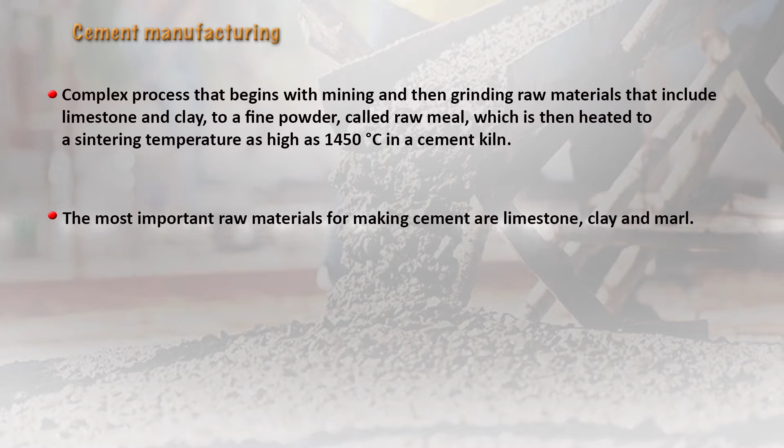The raw materials used for making cement normally include limestone, clay, and marl, extracted from quarries by blasting or ripping using heavy machinery. In India, limestone reserves are quite abundant. You find them in Meghalaya and in certain southern regions. There are a lot of good companies manufacturing cement, very good ones even in the south of India.

They actually have proper environmental rules, and they even convert the fly ash and other materials coming out of their processing, recycling and reusing them for other purposes, maybe for roads or for making eco-friendly environmental blocks for construction. So even the final products can be converted into non-toxic and useful products later on.

Basically, cement is a binder, a binding agent. It is a substance used for construction that can set, harden, and adhere other materials to bind them together. You would have seen in construction places, even when constructing your own houses or companies, cement is being used. First you see a little bit of red soil or clayish material, then you use the gravel, then you use the cement.

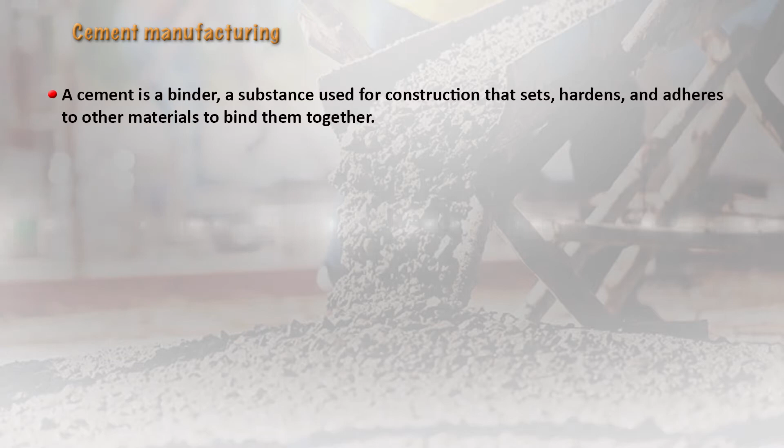All this is mixed together, and sometimes a binding agent like Fevicol powder is also used. They are all mixed with water, in a consistency that can hold the blocks or bricks together. Here you find clay bricks put together, bound in between with cement plastering material, and then the outer plastering is done, and also for the roofing where lintels have to be done for the houses.

Here again there are big machines that come, the ready-made cement and gravel mixer, where all these materials are put in and it keeps rolling in a mechanized way. Then it has special equipment where the mixture can be spread out evenly on top of the buildings, on those beams, binding them together, and after hardening it becomes a very solid, airtight, and waterproof material used in construction purposes.

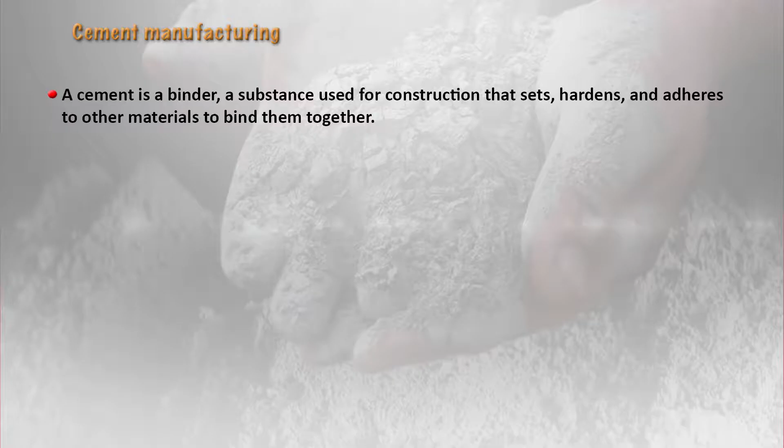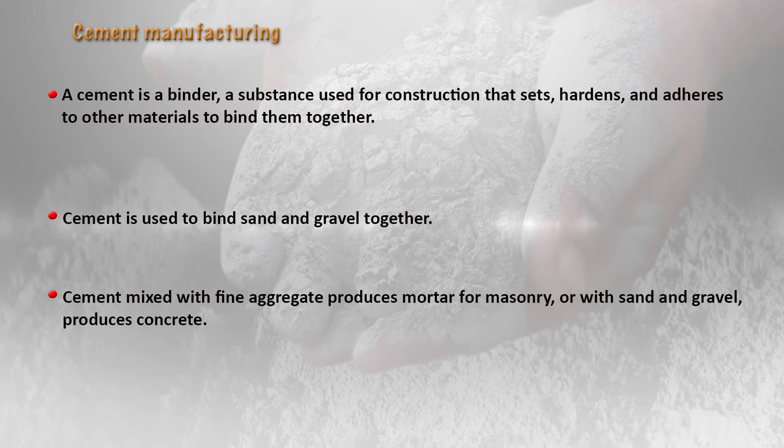The initial calcination reaction in the production of cement is responsible for about 4% of the global carbon dioxide emission.

So it is not that the cement industry is free of adverse environmental impacts. It is responsible for a certain amount of global carbon dioxide emissions, contributing to greenhouse gases and global warming. The overall process is responsible for 8% of global carbon dioxide emissions.

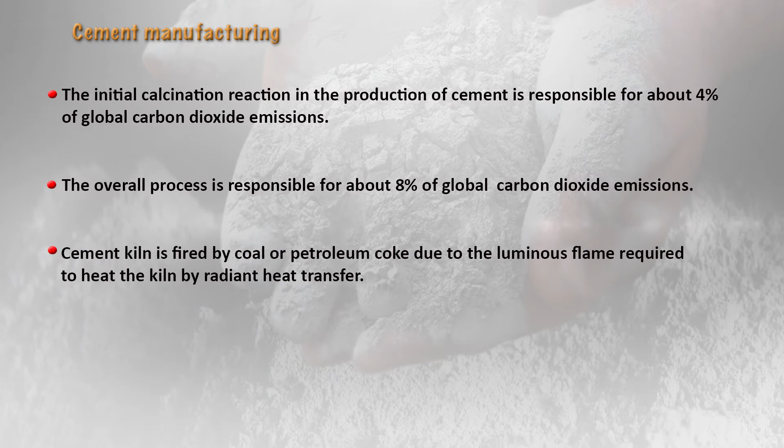The cement kiln is fired by coal or petroleum coke, due to the flame required to heat the kiln by radiant heat transfer. As a result, the production of cement is a major contributor to climate change.

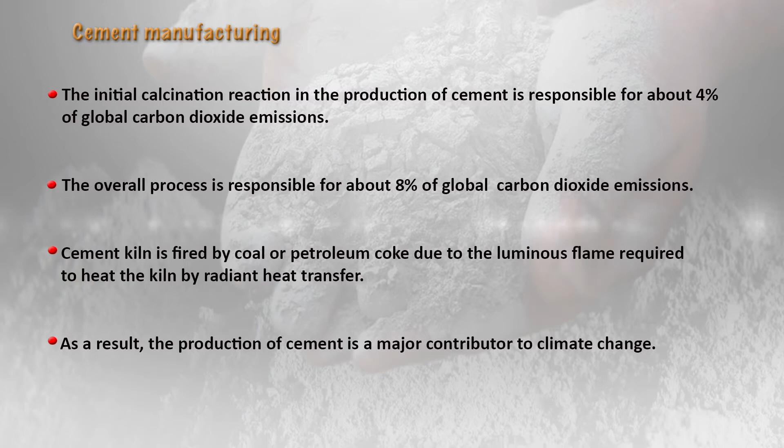The most common type of cement is hydraulic cement, which hardens by hydration of the clinker minerals when water is added. Hydraulic cements include Portland cement, made of a mixture of silicates and oxides, which is what we normally use. The silicates are responsible for the cement's mechanical properties.

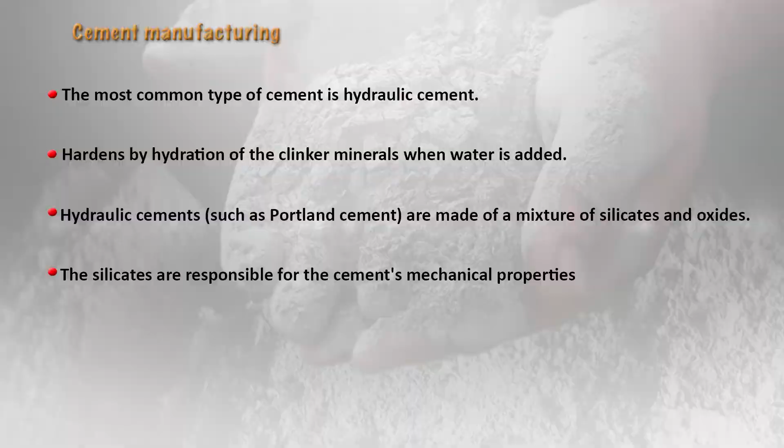Now when conducting an environmental impact assessment survey of such cement projects, we need to identify the positive and negative alterations of the natural and human environment which may affect the quality of life, as well as present and future options for sustainable social and economic development in the area of influence.

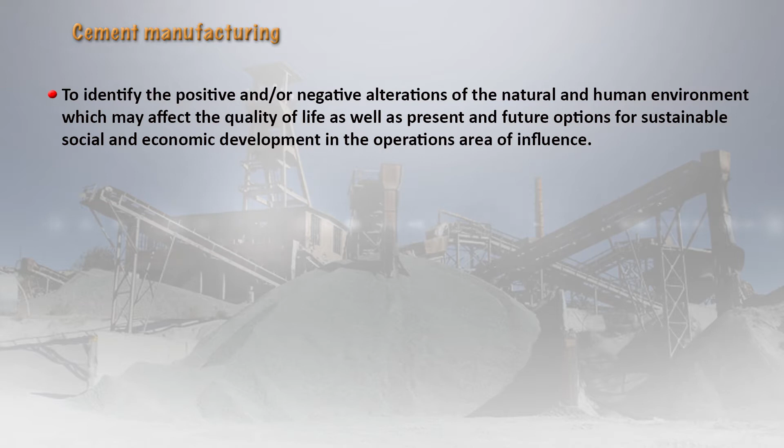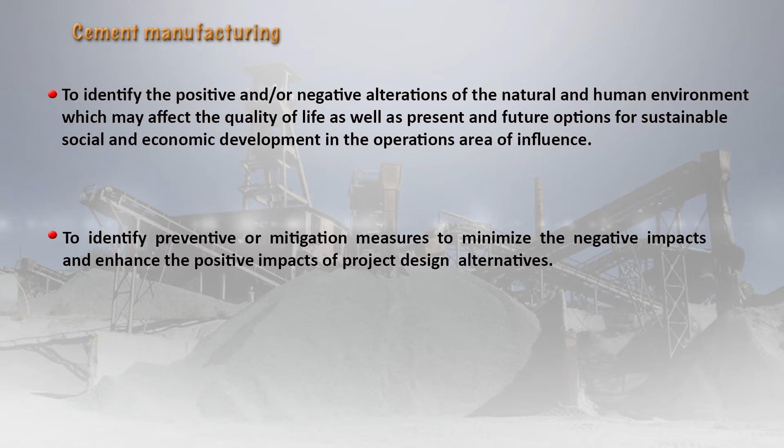We need to identify and discuss preventive and mitigation measures to minimize the negative impacts and enhance the positive impacts of the project design alternatives. We need to determine whether the proposed operation is the optimal or at least a viable solution to the development needs it addresses.

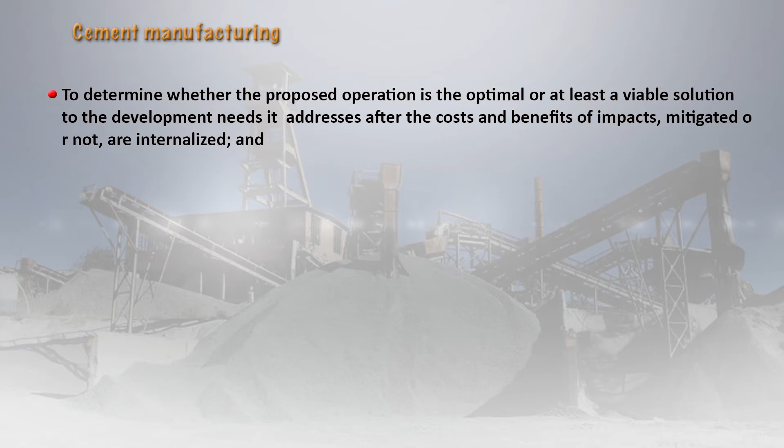After the cost and benefit of the impacts, mitigated or not, are internalized, we need to recommend a course of action including the preventive or mitigation measures, after comparing the alternatives, including that of no action.

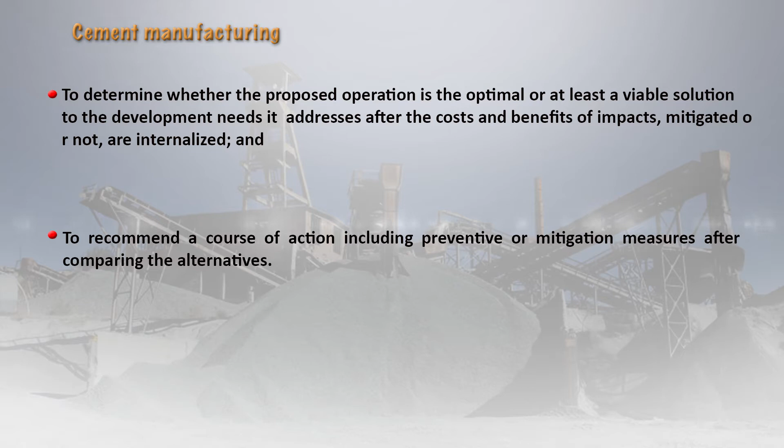A description of the proposed operation and its objectives needs to be outlined, along with an analysis of the project involving a description and evaluation of the impact and cost benefit analysis of the considered alternatives.

This includes a no project option, the rationale for selecting the proposed alternative, and a description of its impacts. So whatever you are submitting, that project should contain all these aspects.

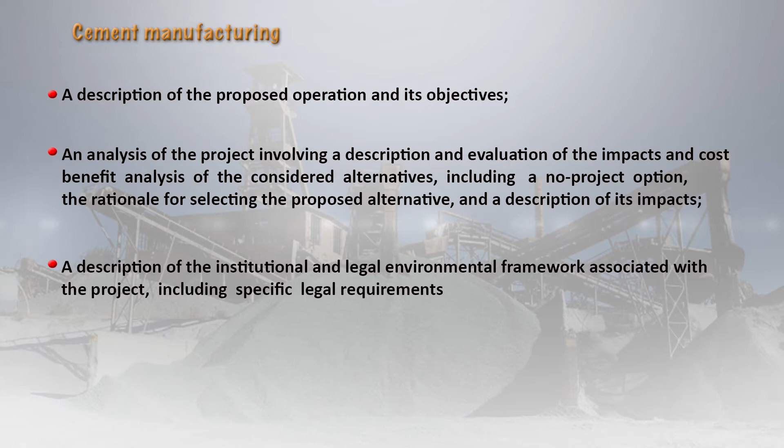Then there should be a description of the institutional and legal environmental framework associated with the project, including specific legal requirements if required.

Then the human and environmental risk assessment need to be written down clearly. Risk assessment can be focused on the consequences to the health of plant workers and nearby residents resulting from operational accidents or emergencies, because even during the operational phase or construction phase, certain accidents can occur.

So whether the health of plant workers will be affected, whether there can be human health problems in nearby areas also, whether people will be affected.

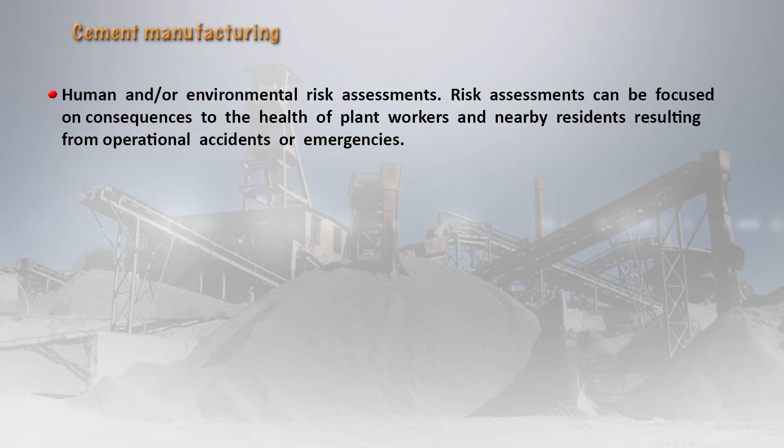This may entail evaluation of low probability events and human health consequences over both short term and long term periods. Similar concepts could be used in conducting ecological risk assessment from plant accidents or emergencies, encompassing evaluation of the probability and resulting adverse effects on non-human terrestrial or aquatic populations or related ecological systems.

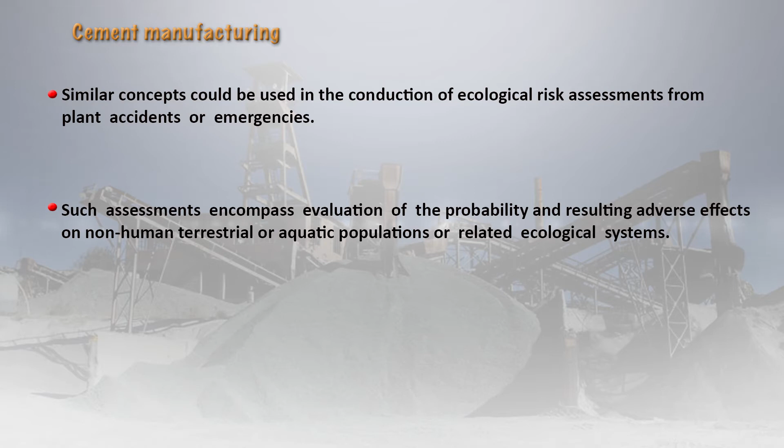Then the resettlement plan - you need to analyze and write down the risk assessment regarding engineering, health and environmental aspects, whether there is an emergency response and contingency plan, industrial hygiene for workers, a worker safety plan, and a public consultation plan, where you can discuss with the public and with people who have years of experience.

The environmental site assessment will consist of evaluating the existing soil, geology of the area, groundwater, and surface water contamination at the proposed plant sites. So the site assessment is very much required, and that forms the first part before the entire study is conducted.

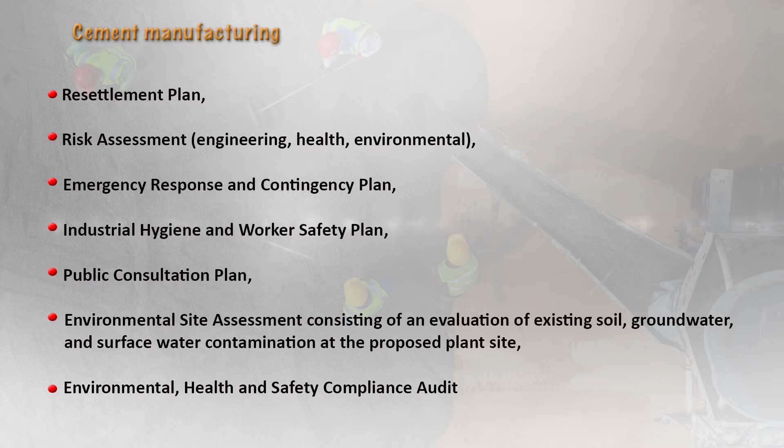Then the environmental health and safety compliance audit also needs to be done, along with a description of the proposed built development or land use, such as port facilities, chalk pits, limestone, clay, pyrite, gypsum and sand sources and their reclamation.

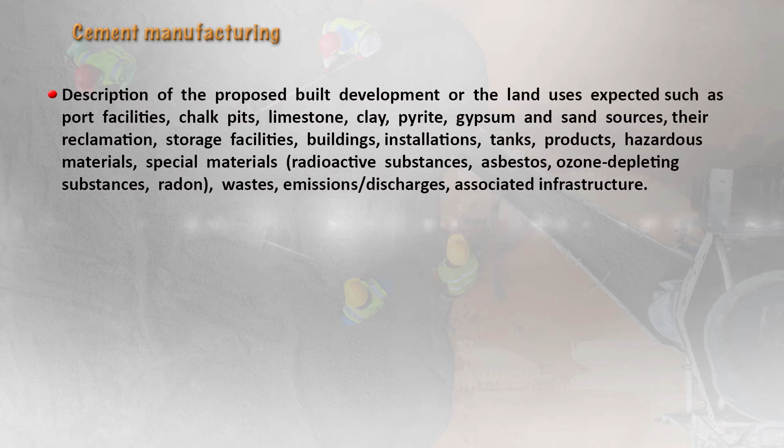This includes storage facilities like raw material, product and waste, buildings, installations from materials coming out of the kilns, mills, grinders, separators, heat exchangers, stacks, tanks above ground and underground, hazardous materials like radioactive substances, asbestos, ozone depleting compounds, radon, other waste emissions and discharges and associated infrastructure. All these aspects require detailed description.

Then the location of all the facilities, direct, indirect and associated.

For example, the transport of raw material, where we will transport the raw material from, then how the finished product will be transported, then the source of power from where it is going to be sourced, and, as appropriate, quarry operations. So these tools, techniques and methodology of operation all need to be described clearly.

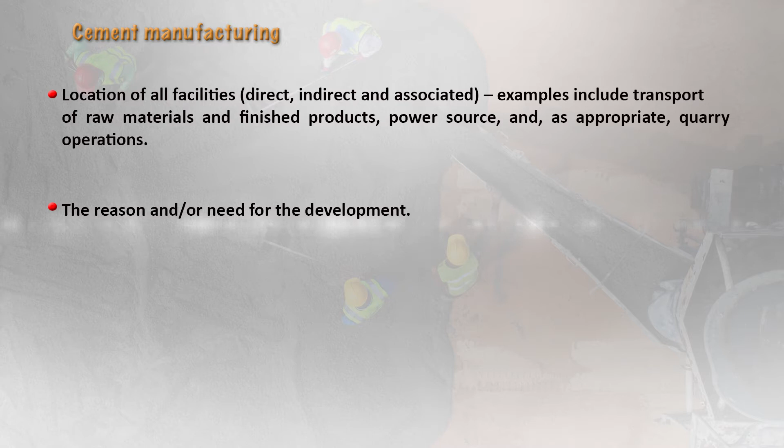One important thing is the reason and need for the development, why this project has to come up there, and also the employment opportunities it can give, like how much employment it can give to the residents and population out there.

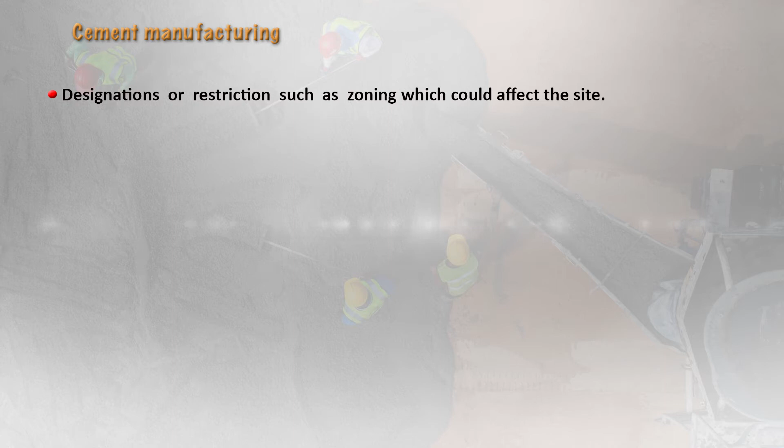Then the designation or restrictions such as zoning which can affect the site, because if there is some environmental impact that can occur, whether any specific zoning has to be carried out. Then you can determine if there are any protected zones in that surrounding area.

For example, if there are important nature reserves, or any drinking water that local people are using, the groundwater reserves, the surface water reserves, then whether there are any recreational areas such as parks where children or the elderly use for yoga or other recreational activities. All this can be affected by the proposed development.

So these also need to be written down. Baseline studies have to be carried out to determine whether these kinds of reserves and areas exist before the proposed development.

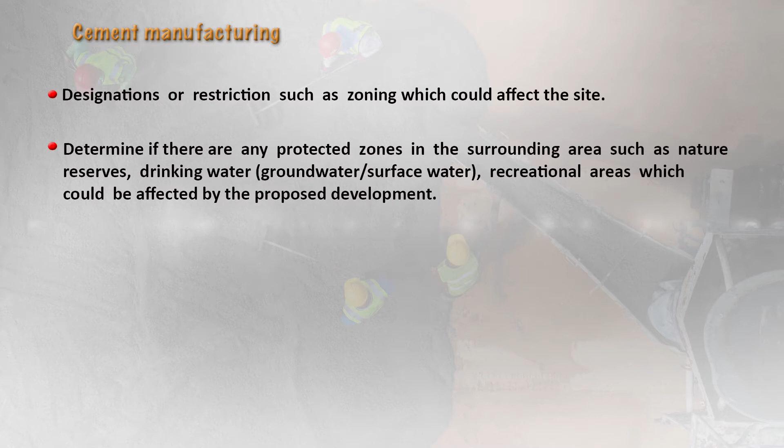Now the site description will be carried out using maps and plans, and aerial photographs can be used and provided. Then geographical information systems can be used, remote sensing can also be used, so the entire area can be mapped out and photographed well for proper planning and usage.

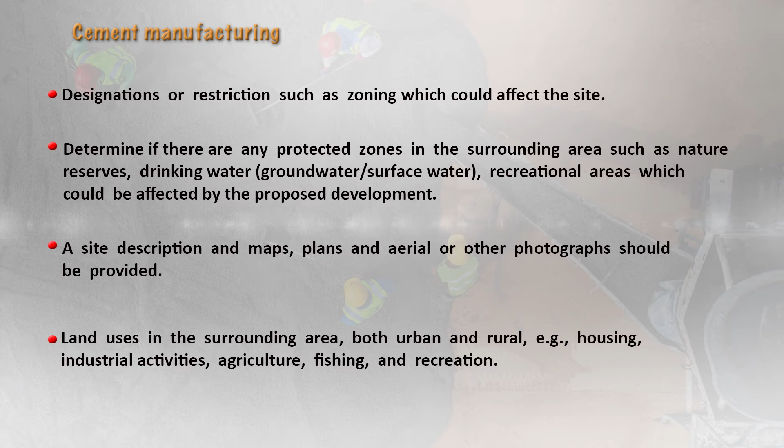The land use in the surrounding area, both urban and rural, for example housing, industrial activity, agriculture, fishing and recreation, this has to be written down.

Then the distance from the surrounding towns and communities. Wherever the project site is going to be carried out, what is the distance from that place to the surrounding town or community, and in that town or community, what is the population size, the characterization of the socio-economic composition, like what employment they are doing, what occupations they are occupied with, the sources of their livelihood.

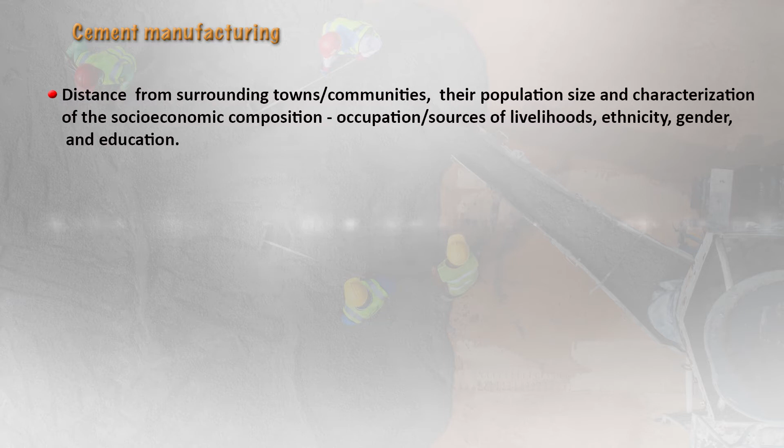For example, are they using aquaculture, or doing basket weaving, jute manufacturing, and such activities? Are they involved in agricultural activities? Are they doing coconut farm rearing, and are those fibers being used for the carpet industry?

So what kind of occupation they are doing, or are people employed in the government sector, working in companies, in educational institutions, then how many health clinics are there in that area - that is also important.

Then we need to know the ethnicity over there, the tribal populations that are inhabiting that area, because they may also have their own roots, rooted to their culture and society.

For example, in tribal places, the people will always see - even if you are going to visit any cave or limestone zone area - what kind of things you are bringing out of that area. For example, any animal bones that can be used in jewelry or other activities. In the same way, whether any precious metal is being taken out of that place, because then they will all start surrounding you.

They will not allow you to take even the water, because they will think that is being sourced or used for some other purpose. So those local residents also have to be taken into consent, they need to be considered, and detailed discussions have to be done with local communities before formulating any of these projects, and they should not be affected with any internal motive.

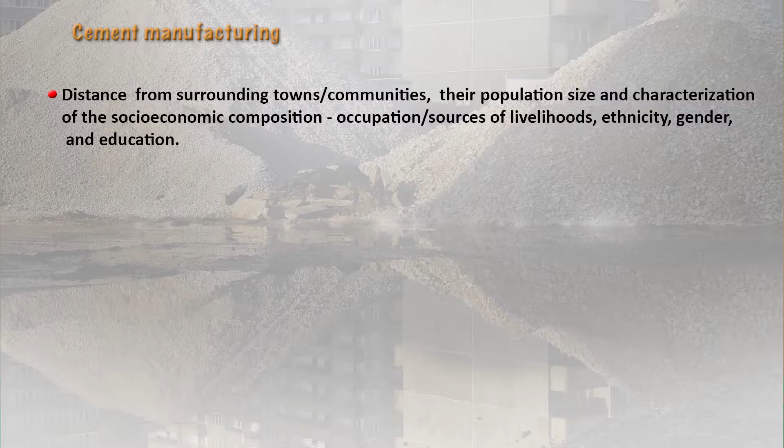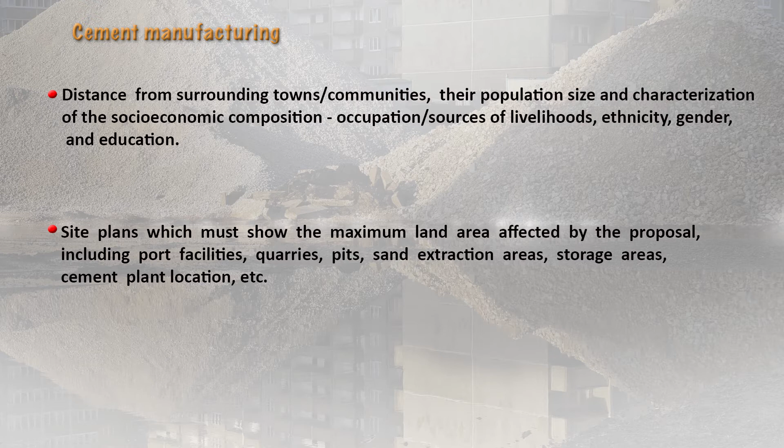The site plans must show the maximum land area that will be affected by the proposal. That can include the port facilities, the quarries, the pits, then chalk, limestone, pyrite, gypsum - what kind of mineral is going to be mined out and used in this project, the sand extraction areas, then the storage area where you are going to store it.

Because it is not that limestone and cement manufacturing - even in the processing, every step you take out, you will store that part in an area, then after that it will again be processed further in the mechanized equipment.

Then the cement plant location, this also needs to be detailed and outlined. Then the layout plan for the development showing buildings, stacks, storage area for the raw material and waste, the roads, then the parking facilities, infrastructure including all the utilities such as fuel filling station, the power supply, the water supply.

Because if you have seen the cement industry, they will have these kilns and long tractors and mechanized belts and conveyors, where things are transported from one part to another. Even this infrastructure will be operating on power supply, certain diesel or certain generators. So where is this power going to come from, and are there any fuel filling stations nearby that they can use for their activities?

Then water also is required in large amounts. So the water supply, from where are they going to source the water?

Then the elevations, the cross sections, the plans of all the built development, supported by photos and other similar methods, should also show the visual appearance of the area that is being proposed.

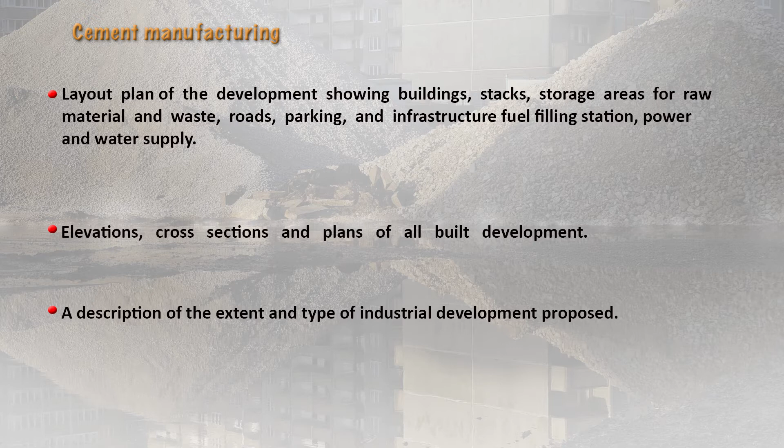Then the flow chart of the proposed activity and information on the input rate - for example the raw material, the water, the chemicals that are going to be used - then the output rates: the wastewater, the solid, the hazardous waste and the air emissions. So maybe flow charts and network diagrams can be used to formulate this.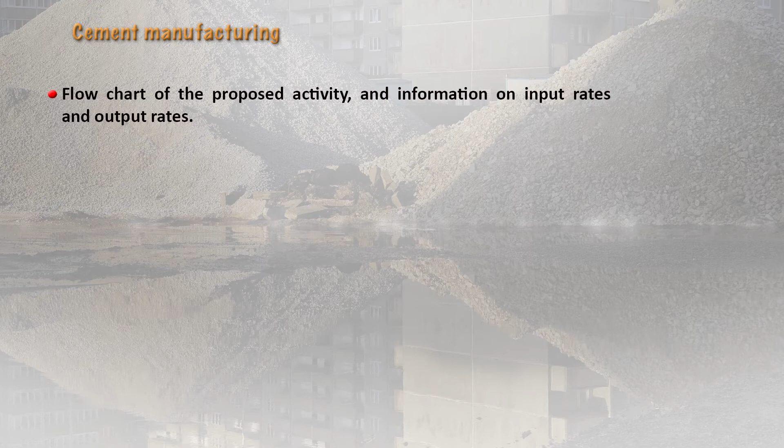In the cement industry, a lot of wastewater is released. So even this wastewater, is there any primary and secondary treatment that is going to be done, and then will that be discharged? That also needs to be described.

Then in that wastewater treatment, how is the treatment going to be done? Whether you have a physical screening process, whether large screens and grids are available, and whether any treatment plant is available, whether biological treatment is going to be done, chemical treatment using alum and others, or coagulation is going to be done. So what type of chemicals will be employed?

In the same way, in biological treatment also, are the facilities existing? Can they be done? For the air emissions, do they have any stack filters? Do they have electrostatic precipitators, or any damping equipment where the particulate material or the emissions can be substantially reduced? These also need to be written down and described clearly.

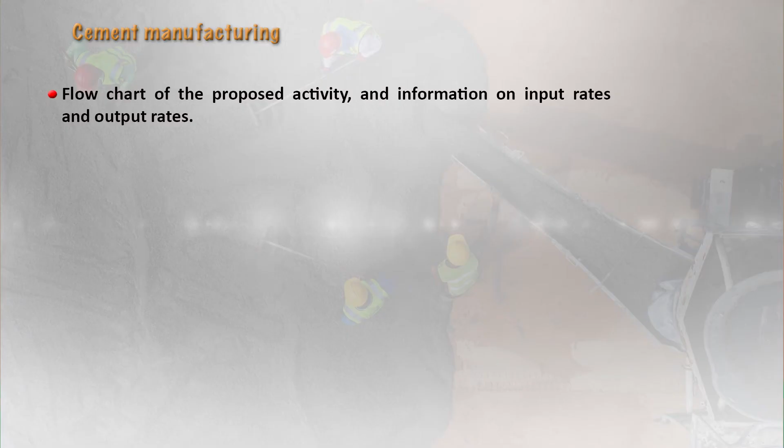Sand, limestone, clay, pyrite, gypsum and chalk extraction activities, water catchments, port facilities, transportation, storage of the raw material, cement processes which are basically the grinders, the preheaters, the pre-calciners, the kilns, then the storage silos, parking facility, packing facilities - everything has to be outlined clearly.

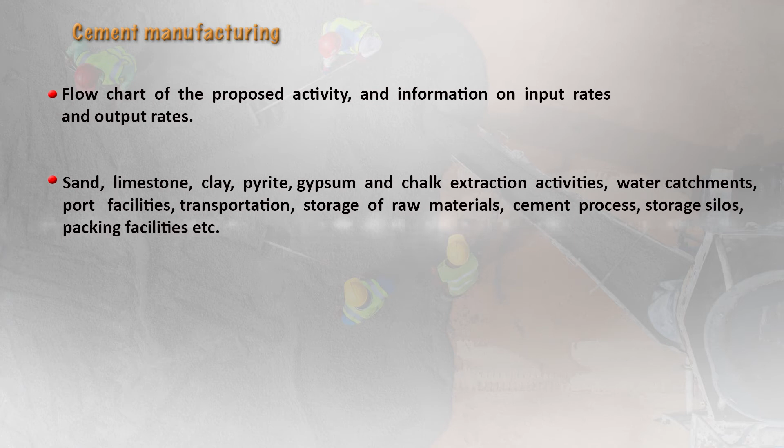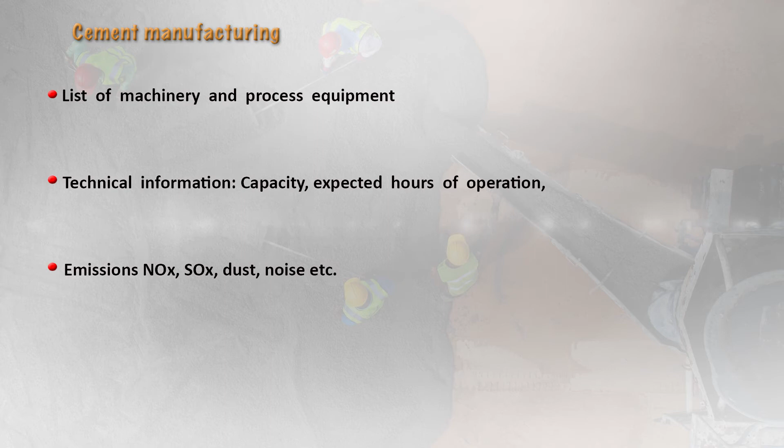Then they need to list the machinery and the process equipment. Technical information has to be given according to the capacity, the expected hours of operation, then the emissions regarding nitrogen oxides, sulfur oxides, dust and also the noise levels that will be liberated as a result of these project activities.

An estimate of the essential types and expected consumption of the raw material. So what are the types of raw material that is going to be used, and the amount of expected consumption that will also be used in the process.

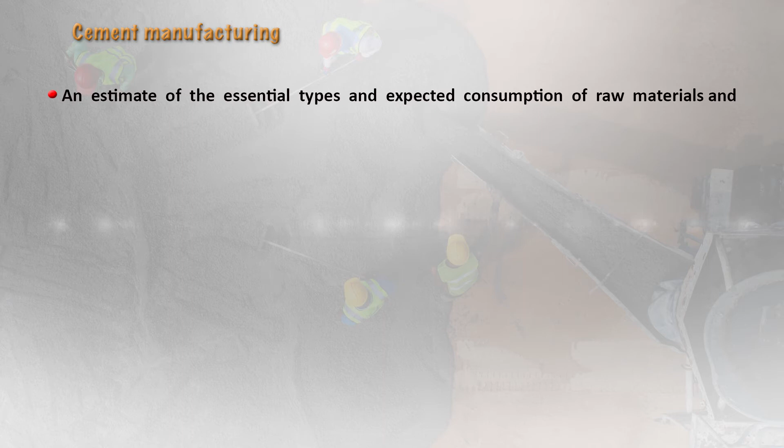The granulated blast furnace slag from the iron industry, aluminum silicate from the refining of oil, oxyton, the regeneration of aluminum scrap, calcines which is an intermediate product from the cellulose industry, fly ash from the electrostatic filters at the power plant, fuel types.

So all this needs to be taken into account, and these are certain examples that have been taken from the industries that have conducted certain EIAs.

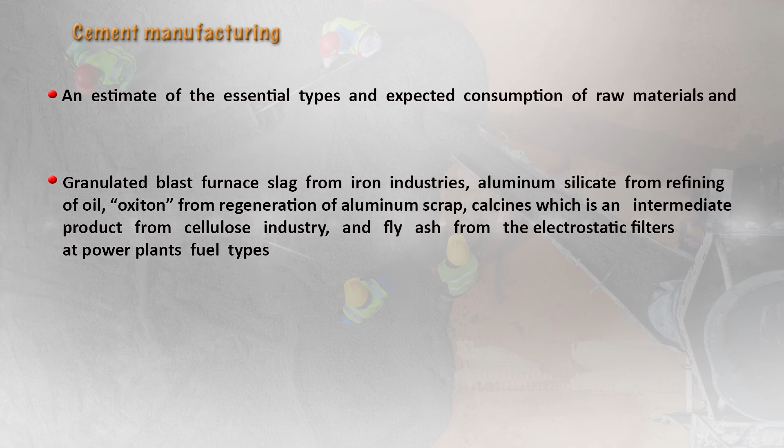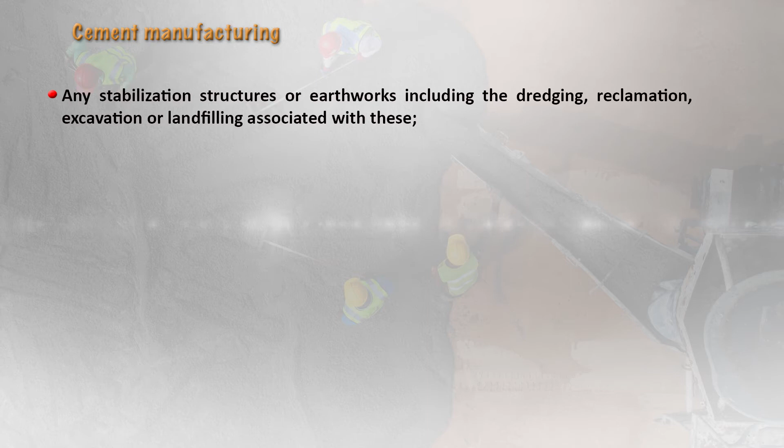Then whether any stabilization structures or earthworks including dredging, reclamation, excavation or land filling associated with these are being done, the quantities of the material to be moved to or from the site, the method of disposal of the excess material, the sources of material to be brought to the site.

Details of the construction workforce, expected numbers, the work camps in the construction period - how many people will be employed there, how many the company is going to employ, the construction workforce, the expected number, and whether they are going to work in shifts, then the camp arrangement, how are they going to stay - all this during the construction period should be described clearly.

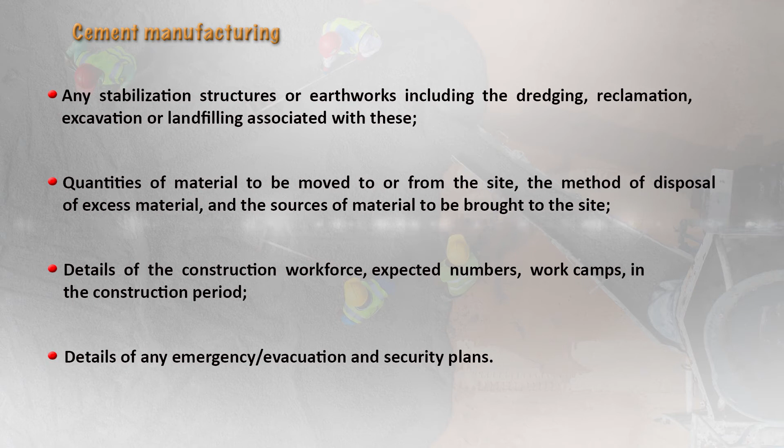Then details of any emergency, evacuation and security plan. In case of any blast, is the health of those people going to be affected? So will there be any medical camp, any medical center, any hospitals, doctors or nurses or medical personnel employed there?

The stockpiling of medicines and certain first aid measures have to be there. On-site, 24-hour availability of doctors and nurses should be available. In case of any problem, whether there is any safety issue, an alternate evacuation route should be available so that people can follow that and move out. Otherwise, large chunks of rocks and this can actually hamper their health and survival.

Finally, the land characteristics, the air quality, the water quality, the geology, the soils, the habitats. In the habitats, the terrestrial and aquatic habitats need to be assessed, whether there are any endangered species in that area, whether there are any national parks and protected areas which are of interest. All this has to be taken into account.

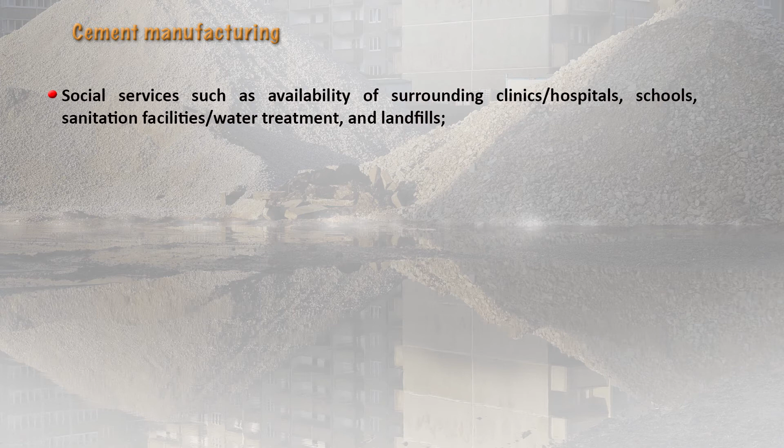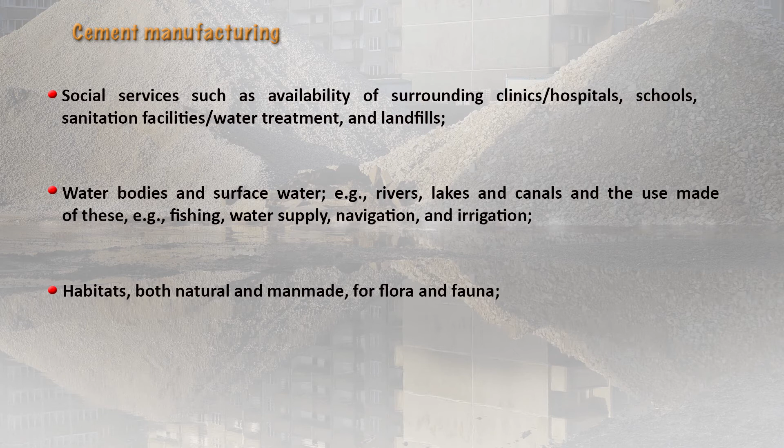Social services such as availability of surrounding clinics, hospitals, schools, sanitation facilities, water treatment and landfills have to be noted down. The water bodies and surface water, for example rivers, lakes and canals, their use like fishing, water supply, navigation and irrigation. The habitats can be natural as well as man-made habitats for the flora and fauna. They also have to be described, whether they exist and how they will be tackled and cared for well.

This is an example of an EIA of a proposed cement plant which was to come up in southwestern Nigeria. It was done by scientists in the year 2013 and it focused on the EIA of the cement plant at southwestern Nigeria. There they were manufacturing Portland cement which causes environmental pollution.

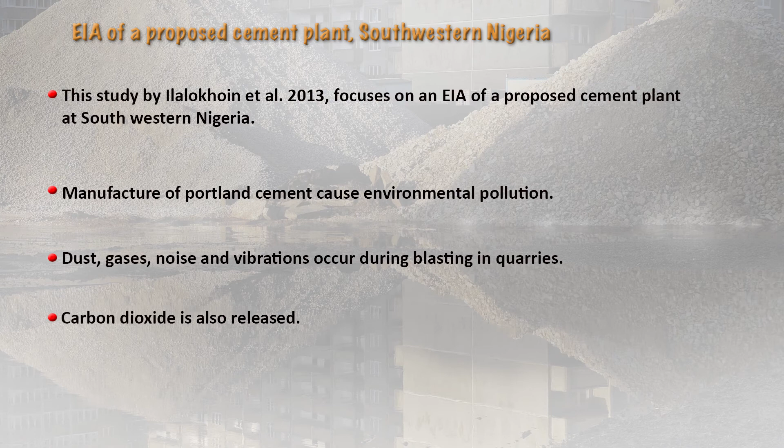They suggested that dust, noise, gases and vibration can occur during blasting in the quarries and a good amount of carbon dioxide is also released. Their study reported that soil erosion will occur as the topsoil will be exposed as a result of bush clearing and excavation. There will also be a loss in flora and fauna, and significant impacts on the ecology and biodiversity of the area. The loss of vegetation canopy will also occur.

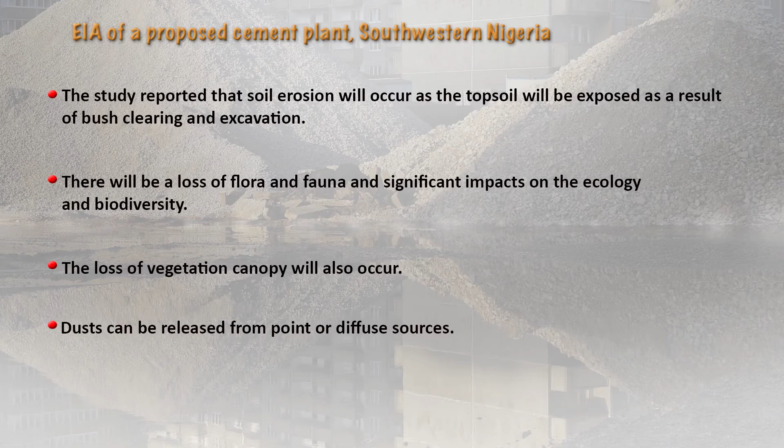Dust can be released from point sources or from diffused sources. This cement dust can affect the health of employees working in the plant and also the communities living nearby. Therefore, mitigation measures such as electrostatic precipitators and fabric filters will have to be installed.

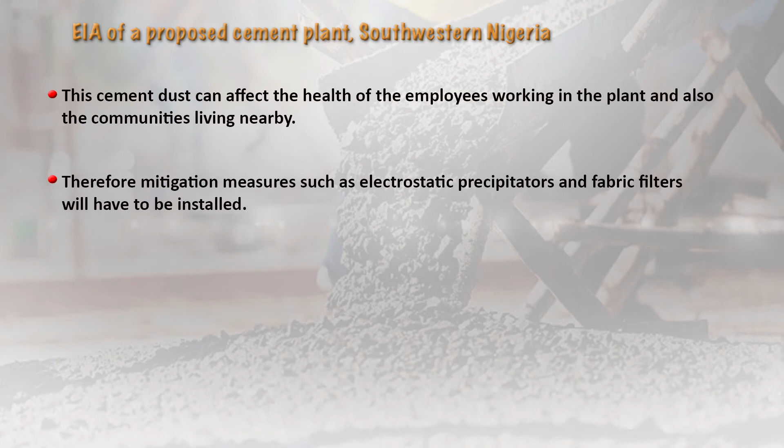They also say that the operation phases will create significant noise pollution, so sufficient hearing protection should be provided. For example, ear mufflers, certain helmets, eye goggles - all this should be provided in order for the eye and ear to be protected during the operation and construction phases for the workers in that region.

The potential sources of vibration, they say, are blasting in the quarries, piling in construction, road traffic and heavy machinery. They can also cause distress among the communities, and these were some of the main conclusions of their study. So that was everything about the environmental impact assessment of a cement industry.

Now let us briefly describe impact assessment due to tourism. We are all fond of tourism, and when people migrate from one place to another, they like to take a break from their normal activities. Tourism can be of various types - it could be religious tourism, environmental tourism or ecotourism, or tourism of the general kind like meeting people, understanding and appreciating different cultures, learning a different language. Some people like to tour and meet people, understand the languages, the culture, the dressing style, the cuisine and so on.